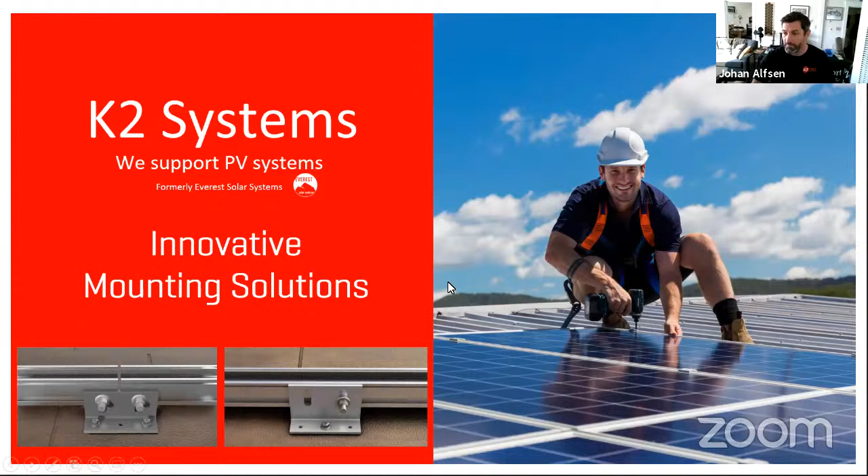So again, my name is Johan Alfsen. I'm the Senior Director of Product Marketing, but my background is in installation and technical training. I manage the marketing department along with Dakota, and she's on here in the background making sure everything's running smoothly, and she manages our marketing department. I come more from the technical side, managing product marketing as well as product technical training, and we're developing a whole new training program and adding all kinds of videos and technical tips and tricks and things like that.

So again, my background was as an installer when I entered the market. I entered the industry in 2004. Then from 07, probably actually 06, to about end of 2018, I helped launch Quick Mount PV, which was a company. It's not necessarily a company anymore, it's more of a product now, but I left them in 2018 and joined K2, which was then called Everest, and now we are K2, and I'll explain that in a minute. So I've been with K2 for about 3 years now, and my history has been working on product development, technical training, and obviously a little bit of sales as we got growing.

And Nick actually worked with me at Quick Mount for many years, so we've been on this journey together for almost 15 years now. We've seen a lot of changes, and I'm going to get into that as we get into this, what I call the evolution of mounting systems.

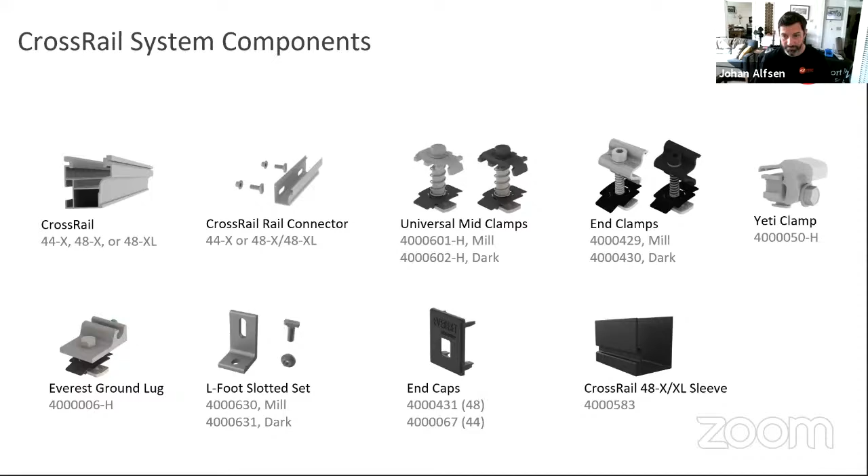So again, these parts are universal, and I'll just hop right into these parts real quick.

Nick, I didn't want to cut you off—I think you were going to say something. No, you're doing great, you were just going over the tilt system. We'll get into that when you get to that slide. Thanks, okay cool.

So just to show an up close version of these clamps, everybody—if you haven't used our system, the first thing you're going to notice that's different is the clamps and how they go in the rail. What's unique about our rail system is that you can use the rail as an actual raceway for your wires, which is really nice.

I just did a system using the new trunk cables from Enphase, and I figured out a nice setup where I tucked all the trunk cable into the rail underneath the mounting hardware for the microinverter, then let the whips that connect go out under the hardware. I didn't have to use any zip ties at all.

If I was transitioning out of the rail, we have little clips that clip on top and keep the wire inside the rail channel. Some guys like to go outside and do their connectors on the side—we have little side wire clips, and I'll show that in a minute. The rail has a nice deep channel so you can put your wires in there, but the clamps are really nice as well.

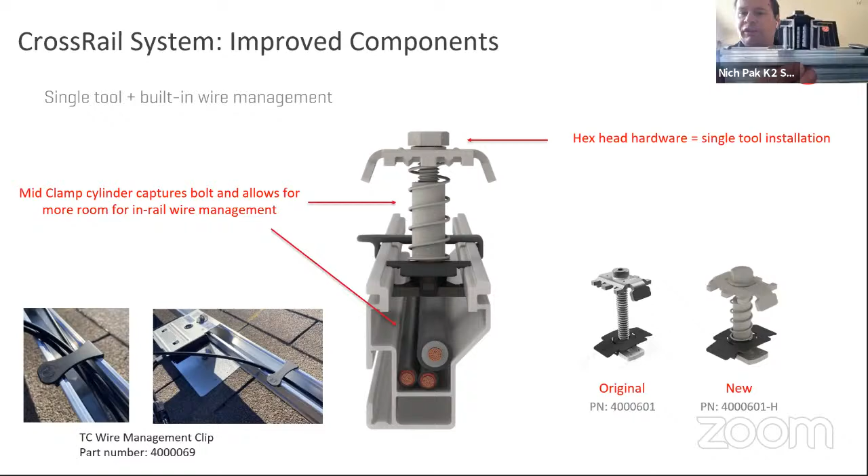I have a setup here on camera for everybody too, especially all of you Enphase users out there, or anybody who's doing wire management. I've got some module frame sections cut on our mid clamp right here for you guys. So you can see the engagement on the frame and literally how much surface area the rail has on that module frame, and a lot of people have told us there's a lot of positive engagement with the rail and the actual clamp itself with our system. And that's what we really try to drive for you.

But as far as what Johan was saying with wire management, I've got some Q cable in the rail for you. And you guys can see all of the real estate you have there to move that cable throughout the system. Like Johan said, this is a big deal in our industry. The only people who are making wire management accessories are the racking manufacturers. So it all does kind of land on us where to get all this cable managed.

So you can see here throughout the rail, there are a lot of options for you guys if you choose to jump onto our equipment. You can really manage the cable, loom it around, and get your system nice and organized up on the roof. Go ahead, Johan. Yeah, no, that's a good point. And the rail engagement is a really, really good point.

And a lot of our sales guys, when I say sales guys, I actually mean sales reps from our customers. So installation sales reps always get asked, why is this different? Or what's different about your installation than the competition? Because you're always going to have to compete against guys who are selling maybe cheaper stuff.

And not that ours is the most expensive, but we do have that German engineering that's pretty robust and sometimes more material. We're working really hard at designing products to not be too much material, have a good price point, but also be strong and maintain that German engineering that we're proud of.

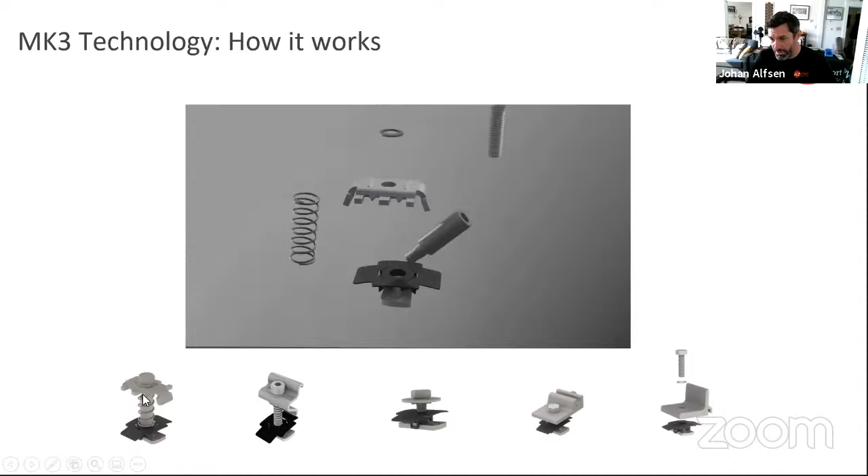So we provide these tools for you guys if that's something you're interested in. So when I talk about this rail engagement, this gives you a little bit better view inside of this digital animation. So it's all pre-assembled. There the clamp is going in, and then you'll see the modules go in.

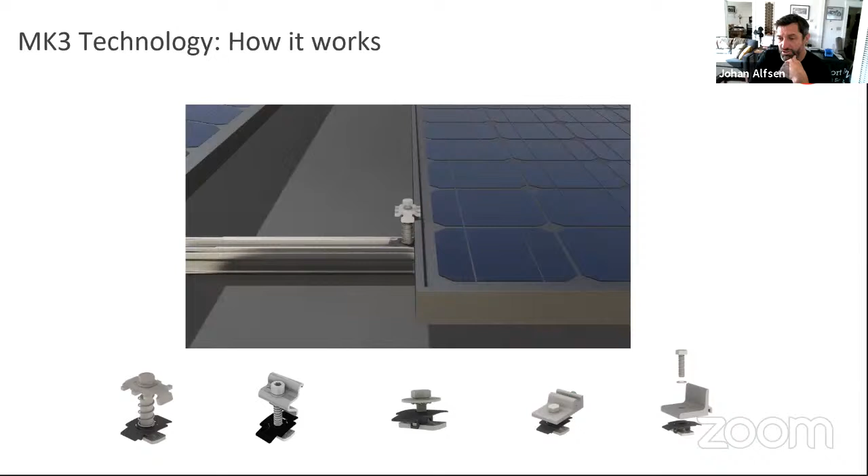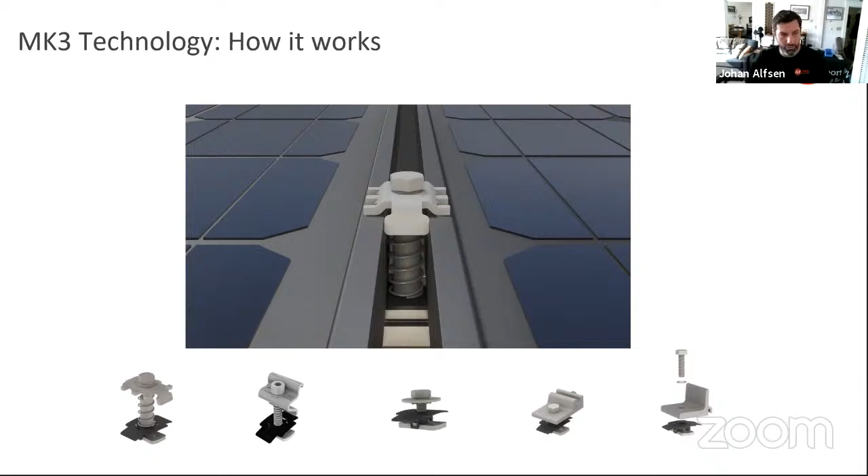So it's pretty simple. If you haven't seen this before, you can get a sample kit, and that really helps. If you're going to be transitioning to the system, just get a sample kit and play with it and see how it goes in, rather than being on the roof and trying to figure it out. So the robustness of those MK3s has been a big selling point for our customers, and it's just easier to install once you get the hang of it.

Our Yeti clamp is our hidden end clamp, and that grabs the inside flange of the module. That's a beneficial product if the system is on the edge of the roof or on the front side of the house, and the homeowner is going to be looking at it every day. You want to sell that quality and the clean look of it. A lot of people are installing skirts, but if you install a system well enough, you can actually make it look real clean, tight, and tuck the rails in with this Yeti clamp. So you can chop the side of the rail off flush with the module, and then use this Yeti clamp that grabs the inside flange and secures it, but hides the hardware, and you can end cap it. And that looks really good.

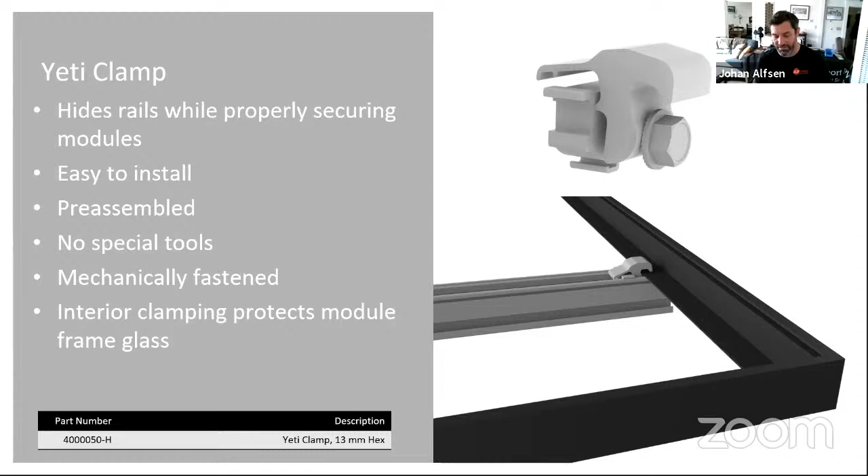If you are at the edge of the module, what I will say is, being an installer myself, on any hidden end clamp you usually have to get underneath the system and reach under there and try to tighten it down or pull it in. It usually involves getting your hands somewhat underneath the module. So if you're using this at the edge of the roof, it can be a little hard to do. So if you're the boss of the crew and you're not necessarily doing the installs, but you're leading them, just know that if it's on the edge of the roof, it might be a little hard for them to get in there and do that.

So that's where the standard end clamps that are top down mounted come into play. If you're using the Yeti hidden end clamps, I would still order the standard end clamps just to have them on the truck and in the warehouse as a backup, to keep it safe for your guys that are on the edge of the roof. You want to make sure they're not putting themselves in any kind of sticky situation, because it can be a little hard to work on the edge of the roof like that.

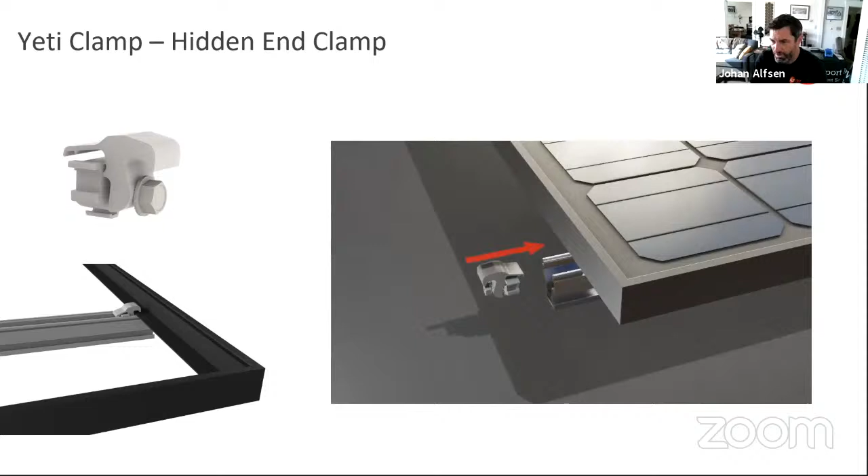So here's a little animation again. These are all from our product videos. Everything's pre-assembled when it comes together there. And then it shows you how the Yeti clamp goes under the module. You can see right through the module in this case, and it slides forward and then tightens down. When you tighten that down, it actuates that kind of hammer, and it tightens the Yeti clamp onto the frame of the module. And then you can put your end cap and make it all nice and clean and tight.

So there, Nick's showing on his camera the Yeti clamp and a little cut section of module frame, and physically showing you how it hammers down on there. And then the hex is inside the rail, and then you can cap it off.

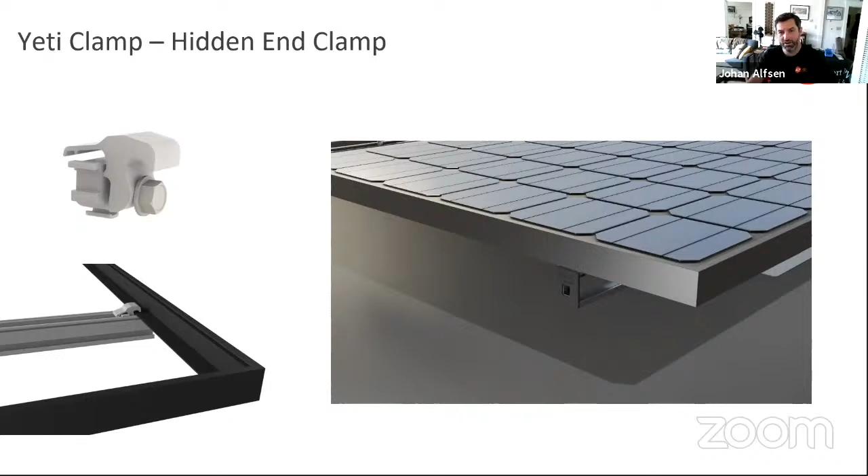Perfect. So our rail connectors, this is actually a really nice product. If you're using other racking systems, a lot of them use self-tapping screws, and they tend to shear off the head pretty easily because you're probably using an impact. And when you're using an impact, at some point, the screw is going to stop and it can't go any further, but the impact's going to keep going. So it shears the head of the screw.

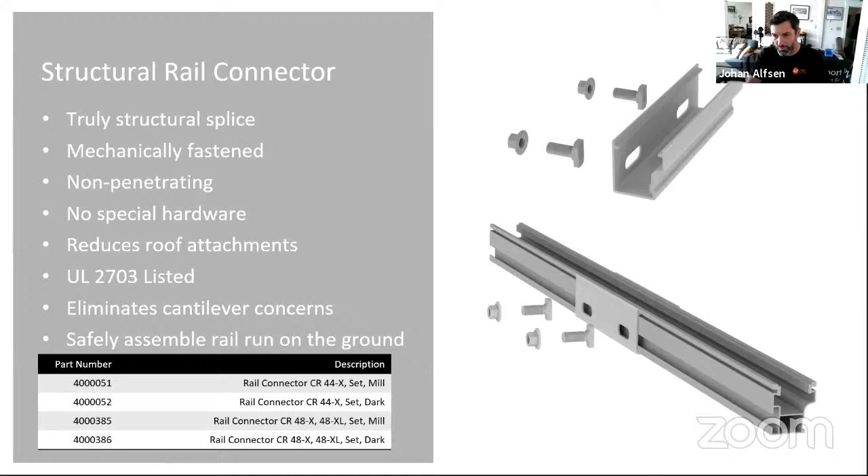In our case, we're using T-bolts. So it's the same T-bolts that connect the rail to your roof attachment. So you don't have to get any special parts. It's all the same. So this makes it a mechanically fastened rail connector. We call it a rail connector because that's what it does. It extends the rail and it connects the rails. Generically they call them splices. We call it a rail connector because this is not limited to any position on the roof.

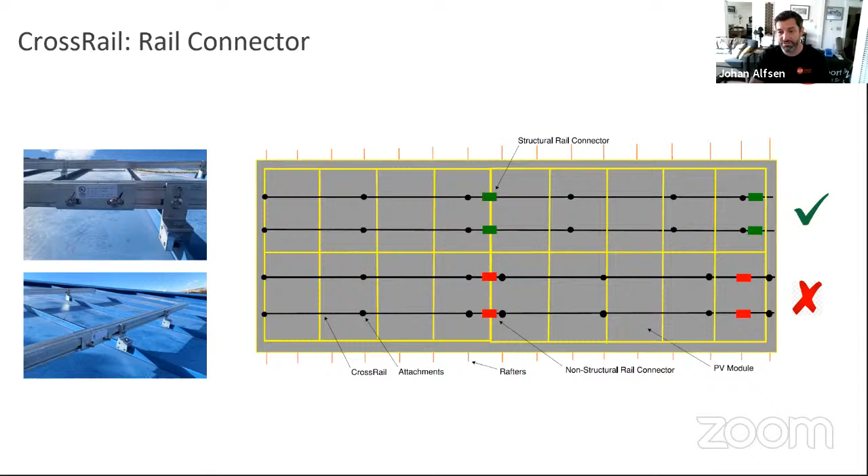So some competitors out there actually have limitations. If you read the fine print and you look at what their limitation is, sometimes you cannot install beyond that second to last mount. You have to be back sometimes 2 mounts, but our rail connector can actually be installed anywhere. So it's that strong. It basically extends the rail as if it was one continuous rail. So that is a huge benefit if you're installing these systems. There's no special hardware. It's not limited. So there's no room for error. So just keep that in mind.

So thank you, Johan. A lot of people do ask us about these clips, and they do slide on the channel. So if you need to move them across the roof, you can. It is a malleable ABS, but it's very friendly to use. You can engage it, disengage it when you need it, put them where you want. So I have people in Northern California who use both. They'll use the top channel clamp and they'll use the side attach Omega as well. And they'll mix and match just for flexibility on the project.

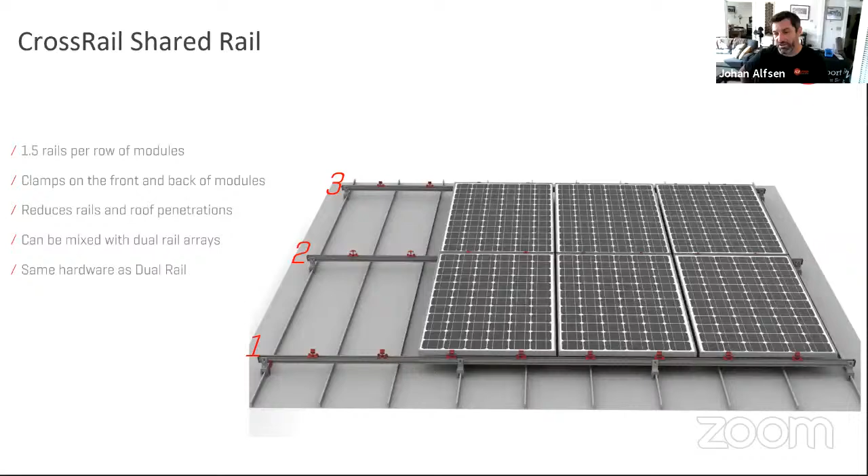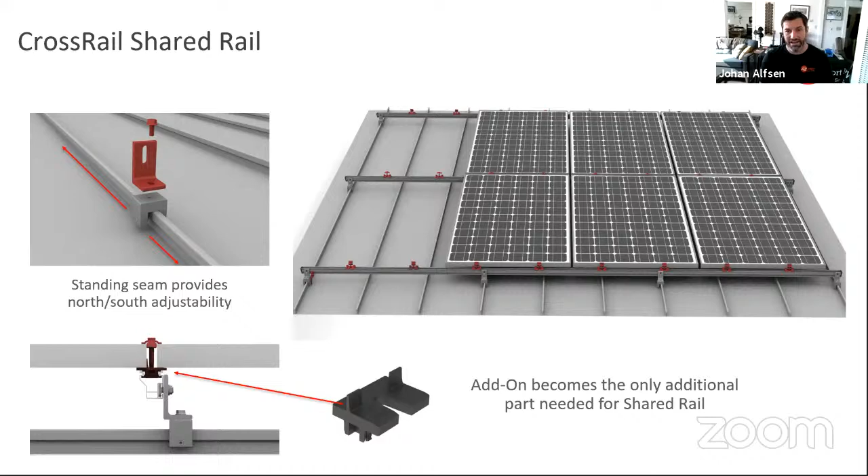Here's the up close of what that looks like. As mentioned earlier, there's only one additional part that changes it from a dual rail to a shared rail - that plastic piece we call an add-on. If you have your mid clamp on here, you basically take this add-on and slip it to straddle over the mid clamp, and that goes in the rail, then you turn the mid clamp to the side and allow your modules to fall on each side. The bottom left picture shows a side profile view of what that looks like. It gives you a perfect shelf to divide the 2 modules so they're not slipping in one direction, and it gives you a nice even split. You push them flush and then set your mid clamp. The same mid clamp for any system on CrossRail will work for this, and it still gets that nice bond for UL 2703 listing.

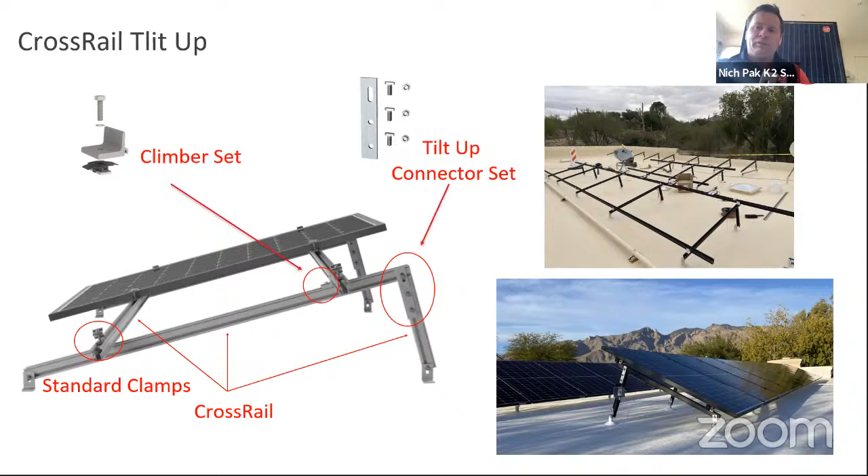And managing water and drainage on a flat roof is a lot easier because you just have to pitch it a little bit, 3 degrees, 7 degrees. So we're starting to see a very high demand for people asking for a tilt system that's adaptable and easy to install. Our tilt system is extremely forgiving - the parts are small, and you have the freedom to make it any size you want in the field, or you can get super organized, cut the parts in-house, and deploy them to the job site. So there's a lot of return on investment with this system.

Awesome, thanks man.

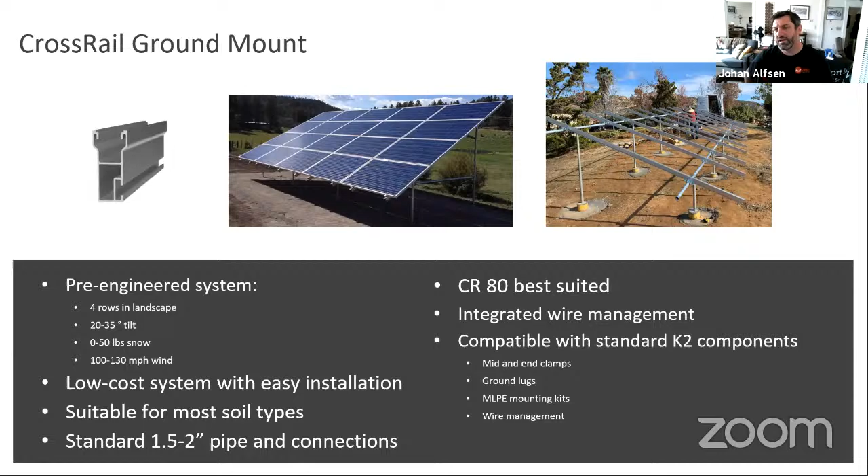So the other system we have within the CrossRail family is the ground mount, and that uses the CrossRail 80. Pretty standard - if you're building up, piping out of the ground, there are different ways to attach to the ground. You've got cast in place, ground screws, helical piles, or ballasted, depending on how you're doing it. You're building up piping, and then we have our ground mount system.

We are actually fine tuning this and offering more universal parts for this. So if you've never used our ground mount system, definitely pay attention to our website, because we're about to release some new improved parts to the ground mount system that are going to be more universal.

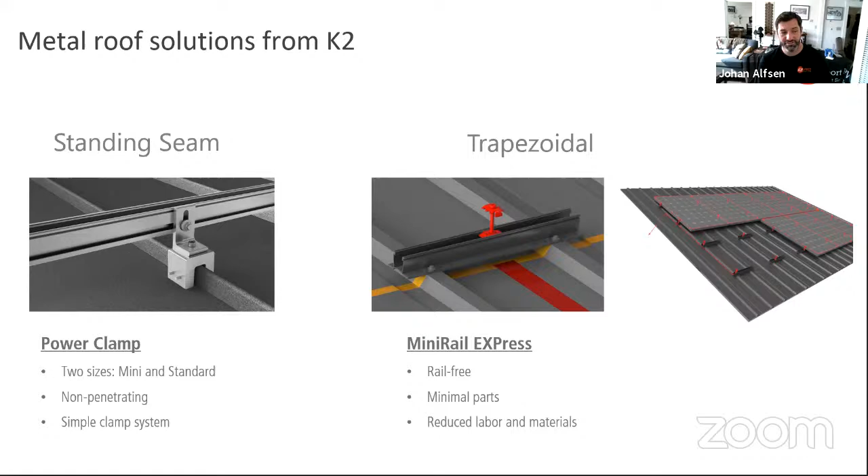For metal roof solutions, as I mentioned, we have a standing seam clamp, and we have a trapezoidal and mini rail system. The power clamp mini is just a single pin, and the power clamp standard is a dual pin. I've got both examples here - they look about the same, but you can see one has 1 pin and the other has 2 pins. It just depends on where you're at. Most guys go for the 2 pin if they're in snow country, which is really common for metal roofs.

So you can check that out - we do have the power clamp there, with the part numbers listed.

The mini rail system is pretty slick. It actually bonds the modules at the intersections, and it allows you to install this smaller mini rail - this guy here. You can see it has these EPDM pads on the sides, underneath here. What this does is it's got a series of holes, so you can shift it wherever you go, and you're only doing one screw per corner. You're not putting all these holes in - this just allows you to shift this little piece, the mini rail.

This is the rail. It comes in boxes of, I want to say 30, and they're just stacked in there. So less parts, no big rails - you just put this down on top and it attaches to the metal itself.

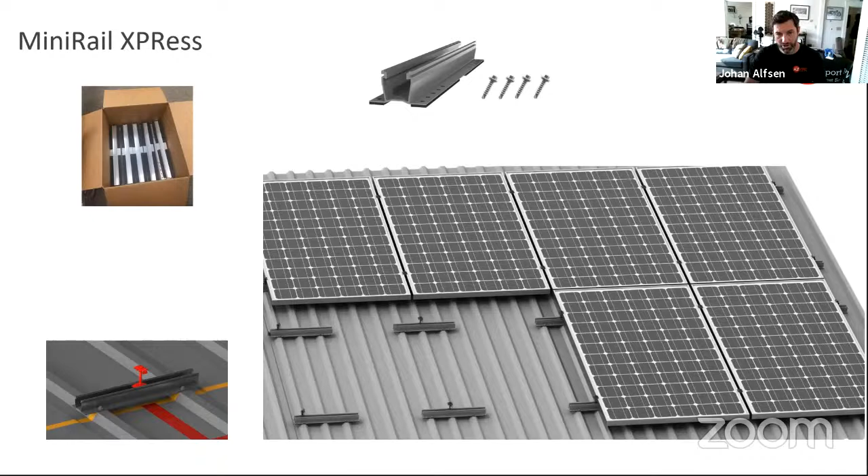As long as it's 26 gauge or thicker, you can attach it to the metal and not have to look for the structure. So you're at the high point, but it has to be that trapezoidal profile, and a certain thickness and width - it's all in our calculator. If you're wondering about that, you can always get in touch with us and we can show you if it's the right system for your application.

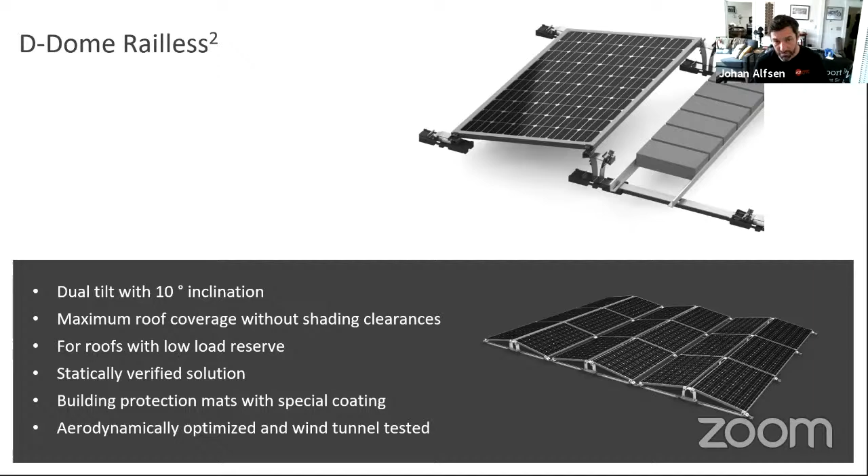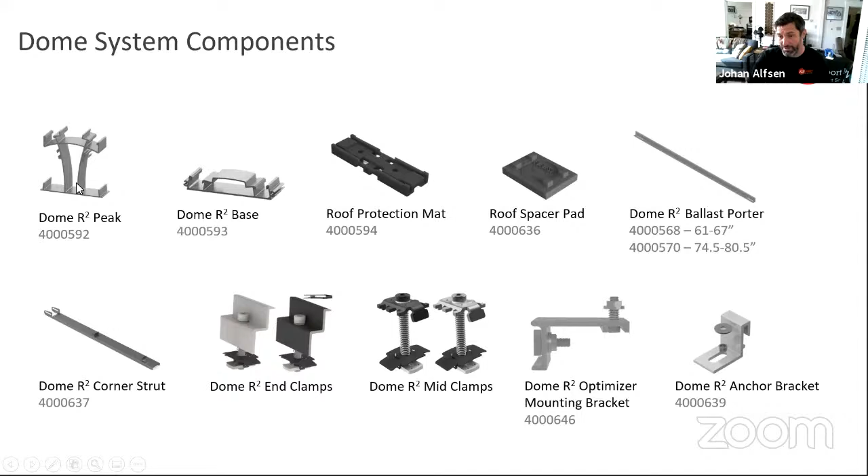So I'm going to get into this, this is a presentation I did at NABCEP. We just did the NABCEP conference a couple months back. I did a presentation called The Evolution of Solar Mounting Systems, and a lot of people liked it. I wanted to show some of the fun slides in here to show you how and why we're getting into these self-sealing butyl non-metal flashings for comp shingle roofs.

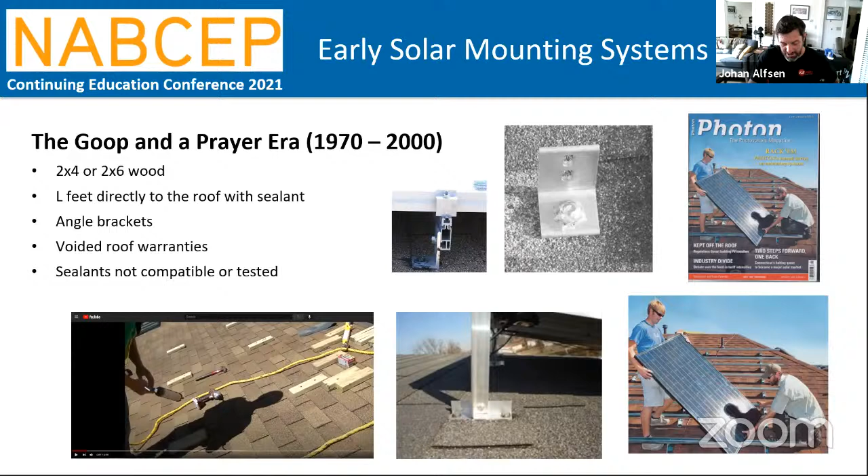One of these, this bottom picture here with this angle stock bracket, you can see where it's concerning. Your seal might be okay because you gooped it up and your prayers are really good, but the depression that it makes into this comp shingle is where it gets a little concerning. You get a lot of expansion and contraction as the roof moves. With the heat and cold and fluctuation in temperature, and this depression in there, it cuts a line into the shingle and water can get in there. That was the big concern, and there was no testing for this.

So what some of the more conscientious installers were doing in the early 2000s, they were starting to try using roofing products, which is smart. They were using things like Oatey flashings. I'm in Berkeley, California, where solar was adopted very early on, so I still see some of these Oatey flashings out there — some have survived and lasted, some not so much. You can see the cracking and degrading of the rubber. As I mentioned, these roofs move and can move this around, and if it's exposed on the edge, it could crack that seal and that rubber. And then there's also room for error.

That's literally a picture a guy sent me of a conduit going through, and you'd be amazed at the stuff I get sent. But yeah, that was a fun one. So installer error there, it's not a bad product, but that's installed improperly for sure.

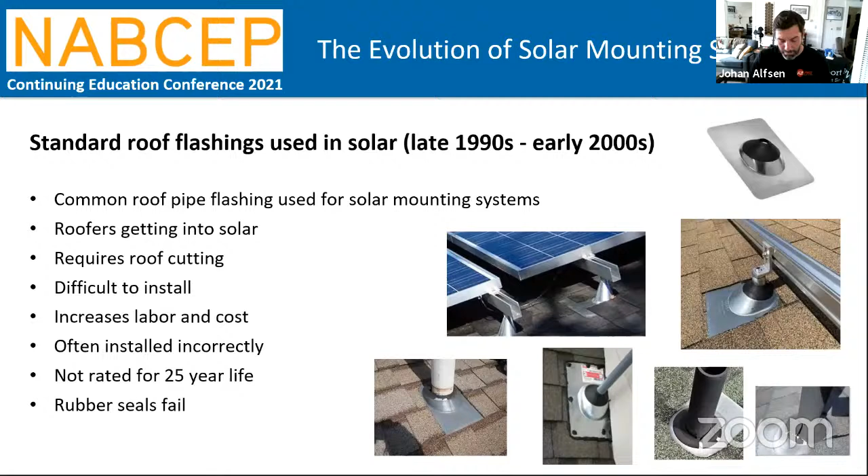The one on the top or middle right, the brown comp shingle roof, that's done properly. So that's the way to do it right. But these are time consuming, labor intensive, and can be quite expensive. Cutting the shingles just takes too long.

So in the early 2000s, I worked for another company and we started doing flashings geared more for the solar installer in mind. It just started out as us making flashings for ourselves, and then it took off and other people wanted to use them. We started manufacturing, and that's how that company was built. Since then, all the manufacturers make their own flashings now - comp shingle flashings, replacement flashings for tile, you get into rail-free systems.

There's been a lot of innovation from the early 2000s to now. There's been so much progress made in the solar mounting sector of the solar industry, and it's pretty exciting.

Now what you're getting is we're starting to see some of these metal flashings be installed improperly. These aren't necessarily bad products whatsoever, they're made well. It's just that they're installed wrong. This happens a lot.

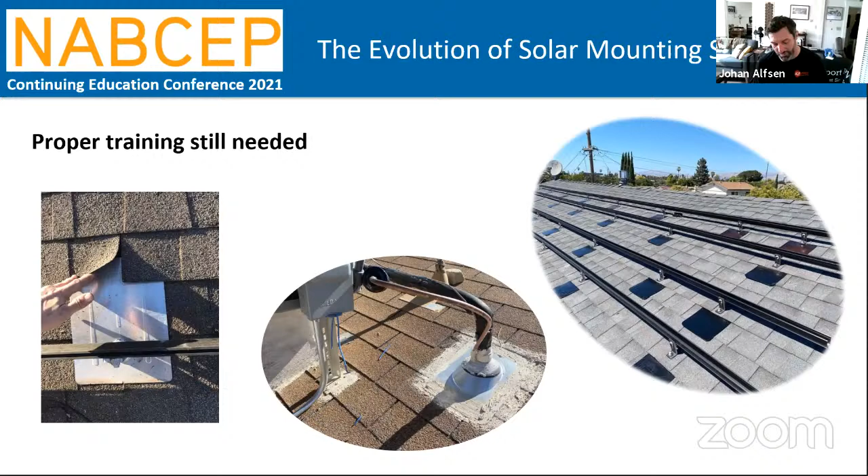So there's a lot of room for error. And not only that, metal flashings are never going away - the installers know how to do it, it is roofing best practices. But sometimes if you're in places like Nevada, like Las Vegas, big solar market there, really hot too.

And the shingles just get baked. When they get baked, you can't necessarily break that natural seal to get a metal flashing underneath there. So these non-metal flashings are coming into the market now, and I understand why. A decade of my own career has been talking about flashing and roofing and best practices, but now you're starting to see these non-metal flashings come into the market, and I can understand why.

Because when you're trying to pry up the shingles, you can damage the shingle. You can void the warranty of the roof. You can rip the shingle. You can create other problems that are doing more harm than good.

And I understand that in places like Arizona, even where Nick lives in the East Bay, in the valley, it gets really hot, probably like in the hundreds in the summer sometimes, and just bakes those shingles down to where you can't pry them up without damaging the shingle. And you could even say that with the cold too, they get brittle and they can crack and corrode and break. So I understand where these are coming from.

And some guys will say, well, aren't we going back to the goop and a prayer era? And I will say to that, no, because these manufacturers are hopefully doing the proper testing, using the right materials that are compatible, and providing engineered systems that are going to be compatible with these roof types. So when we were looking at this and starting to make new roof attachments, we took a hard look at all the products out there, and everybody uses something different.

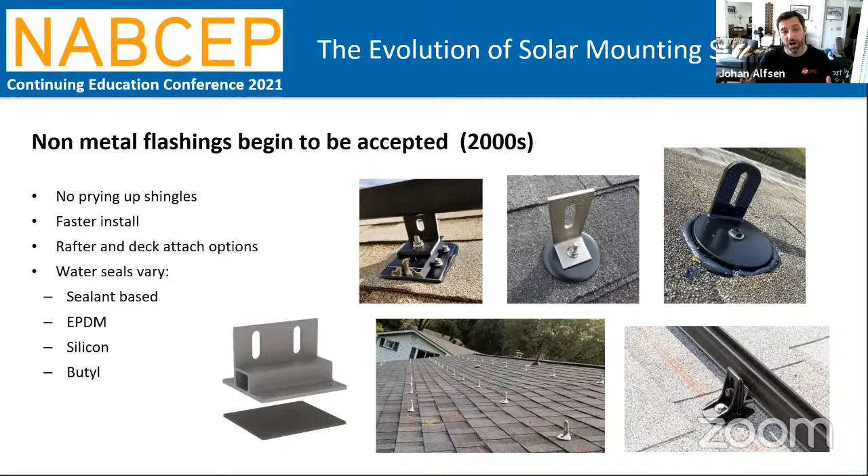So when we researched all of these, the most data we found, honestly, was with, and I'll go back to this slide, but I'm gonna skip real quick to this slide. We found that Roof Tech had the most data, the longest track record of using butyl. They did all kinds of extensive testing, salt spray test, heat tests, obviously the structural testing as well, movement.

So they use a specialized butyl, and we were so impressed with it that we ended up sourcing the same butyl and putting it on our own product, which is called the splice foot. So we use their butyl and their screws, and we're researching all kinds of different styles like this to see what works in different applications. But right now our splice foot uses this butyl and these screws, and I'll show you the benefit of that here as we get into this.

So let me back up again, talk about comp shingle roofs real quick. The reason why this is important to know is because when you're installing on top of a comp shingle roof, the style of the comp shingle is going to become important because you're going to have uneven surfaces. You're going to have seams and breaks between the shingles, and it's important to know.

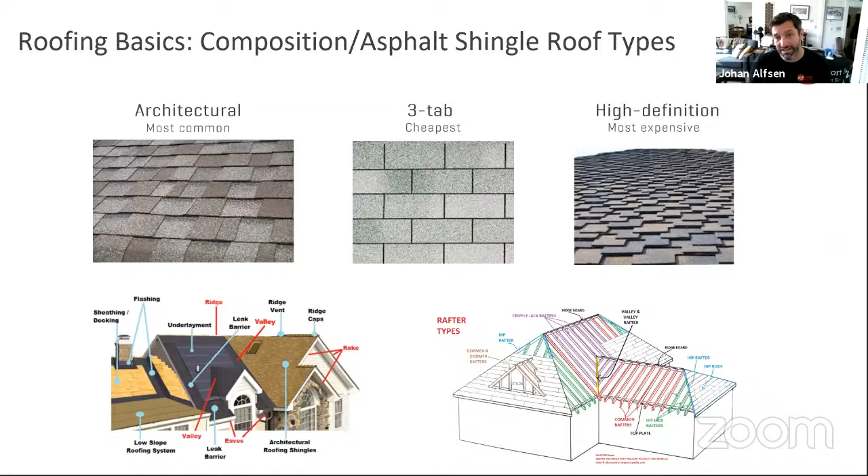And then the high definition shingles are not as common. They are very high end, so they're more expensive. You see them on high end homes, and they last much longer, probably more like a 50-year life mark. And they have these decorative staggered teeth to them, and you can actually cut them and make a clean, nice, even surface to attach. But they are thicker, so you want to make sure you're getting your threads down through the comp shingle and through the ply and hitting your structure, whether that's deck or rafter. So it's just good to know.

And then also with shingles, I do a whole section on roof inspection. It's almost like you're renting a car, right? You want to walk around the roof and make sure you're not inheriting any pre-existing damage before you install on the roof. So looking at the shingles and making sure they're not blistering, cracking, corroding. You can see when the granules start coming out, when it starts to age and the shingles are becoming loose. You could tell when it's time to go. And that's when you want to re-roof.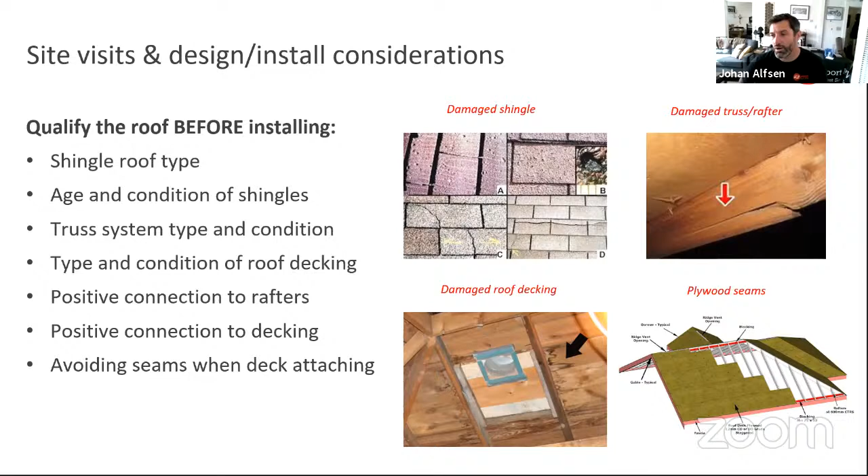And looking in the attic, what's the structure? Is it plywood, OSB? Are the rafters intact? What are you dealing with, basically? So I do that more in our certification program and our training, and we're doing a lot more K2 pro tips and stuff like that in short videos.

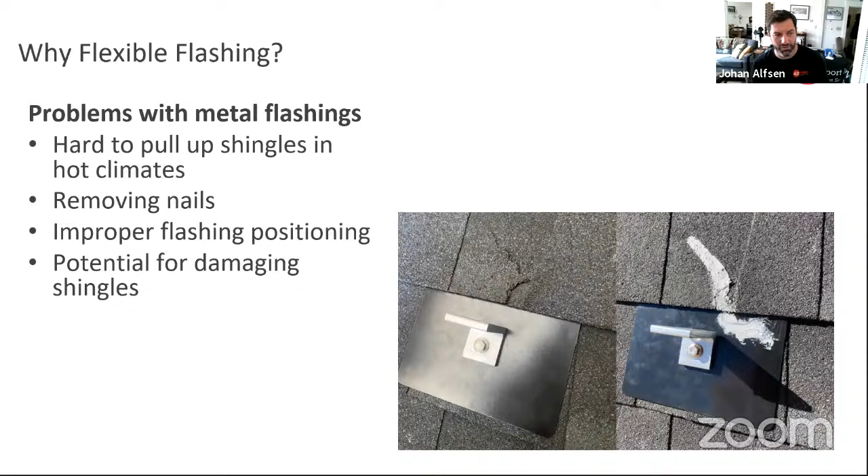So you can see where there's a problem where prying up shingles, removing nails, there could be some pros and cons to that. The number one problem to that is damaging the shingles, ripping the shingles. So there's one I ripped up on, kind of on purpose. I got a little aggressive just to see what it would take to rip them. And then you got to seal it up. Sometimes you don't have black sealant and it looks bad, and it gets all over the flashing, your gloves, your pants, your tools, your work truck. So nobody likes dealing with sealant. And if we can eliminate it, that's best.

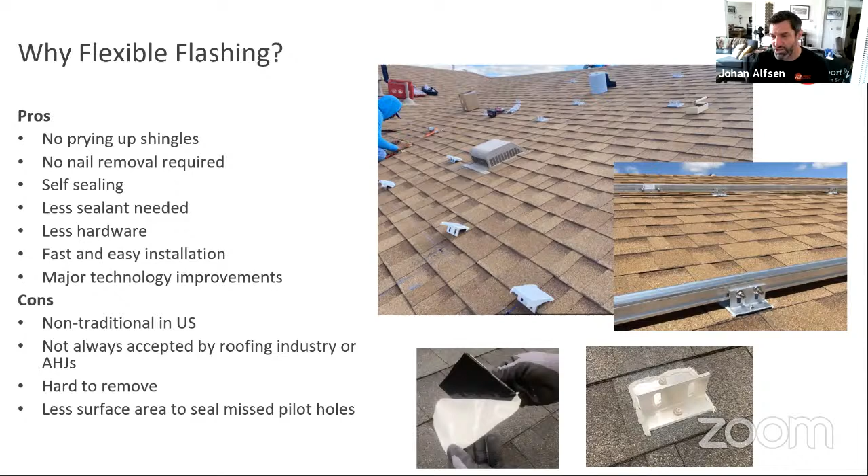And then you also see sealant going around the edges. And we actually just got that approved that it doesn't need that sealant going around the edges, because the butyl does squeeze out. And as I mentioned before, the metal can depress into the shingle. The butyl actually squeezes out enough to protect those edges and not need any additional sealant on the edges. So that's a huge plus. And that is some changes we made once we released this, which we just did for the Splice Foot X and XL.

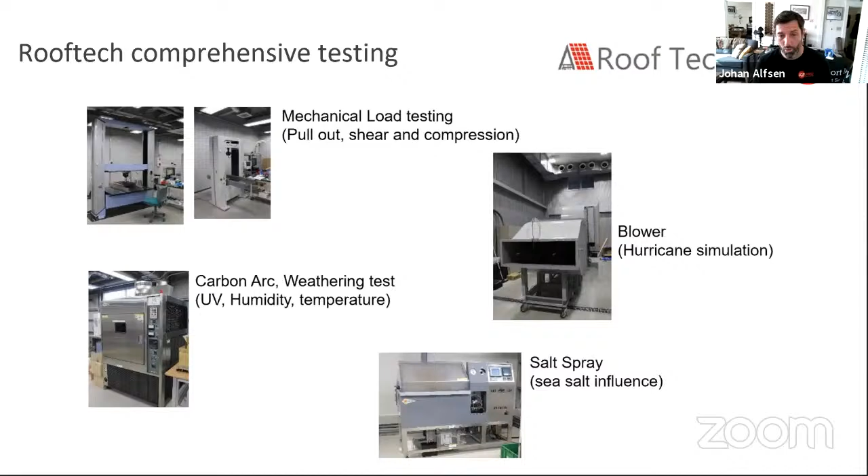So as I mentioned, we use the Roof Tech butyl and the screws, and they have all kinds of comprehensive testing. And we're also doing our own tests, and we're even testing other materials as well to see what works best. And obviously supply and demand is really tough in this era of COVID that we're working in. So we're always looking at new solutions, but right now this specialized butyl is working out very well.

And you can install this on almost any surface that is compatible with comp. Rolled comp flat roofs do work as well, some metal roofs as well, and some TPO roofs actually. So it's mostly used for pitched roofs, comp shingle. You do want to pay attention to the temperature of the butyl because it's tacky, and the temperature of the roof, not the ambient temperature outside. This is the temperature of the actual roof type. So I think there's a little typo there of the ambient temperature, but it's the surface of the roofing itself.

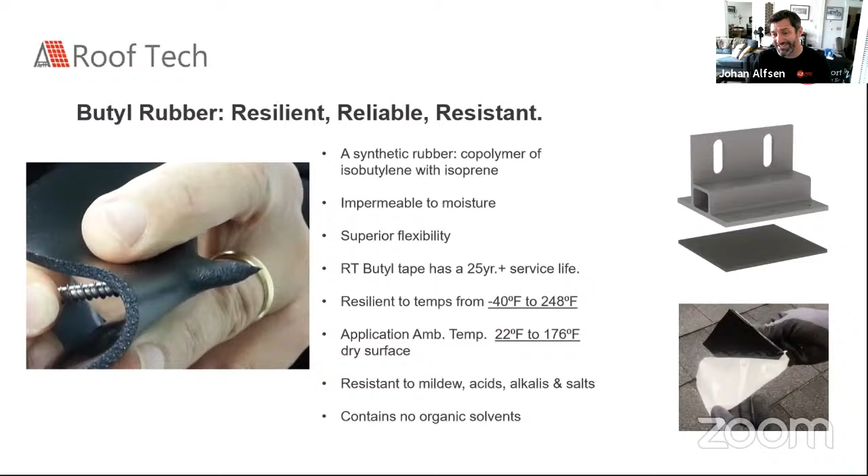So you want to be in that 22-degree range, and you can just get a little heat gun and measure the temperature of the building, and actually measure the temperature of the butyl and make sure it's at that temperature. The reason being is because that butyl actually seals those screws as they go through the butyl; it seals itself in the threads and you don't need additional sealant.

So we have the splice foot X and the XL. I'm going to skip ahead here to show you the application of it. So there's the X and the XL. The only difference is basically the height off the roof. So this is the XL. I'll have both here. To show you a side profile, here is the XL in my left hand and the X in my right hand.

And basically the difference is we added this little shelf here. What that does is two things. One, it gets the rail surface off the roof a little more, and is a little higher profile, which actually is still pretty low profile and looks real clean. And it also creates a nice little shelf. So when you install these, you want this shelf to the ridge of the roof. What that allows you to do is place your rail right on top of there, and it lines you up perfectly with the T-bolt.

So if you're an installer or working with your crews, you'll know that when you put these big 14-foot section rails down, you're usually laying them on the roof. Then when you go to attach it to the roof attachment, you've got to put your T-bolt in and secure it, and sometimes you have to have a partner on the roof holding it up to get it where you want. The shelf actually acts as that partner, so you could do it solo. You place these right onto this shelf and it stages it perfectly so your T-bolt can go in there and you're set to go. So that's just a nice little tip for that system.

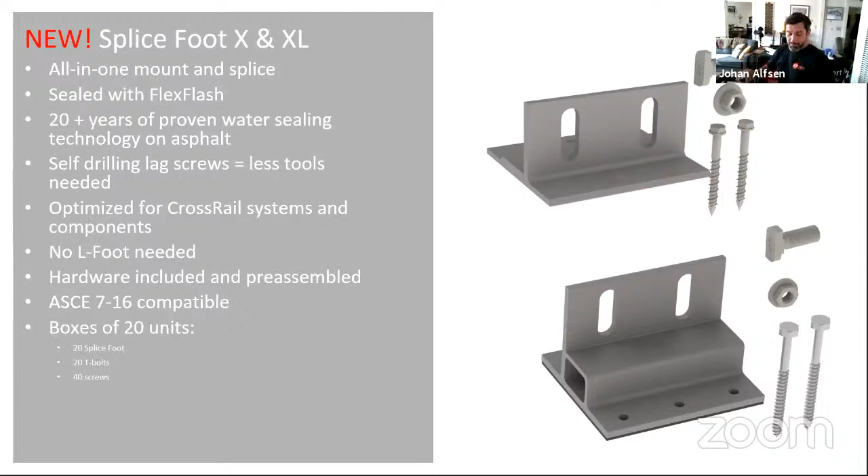So they call it the splice foot because you can use it as a splice. Notice it has two slotted holes in the foot. You don't have to use it as a rail connector or splice. If you have one rail going all the way across, then you only use one T-bolt. So one rail, one T-bolt, and it is kitted with screws to go into the roof, into the rafter. So 2 screws and one T-bolt set per mount. I believe they're boxes of 20 mounts, so you get 20 T-bolt sets and 40 wood screws to go into the rafter.

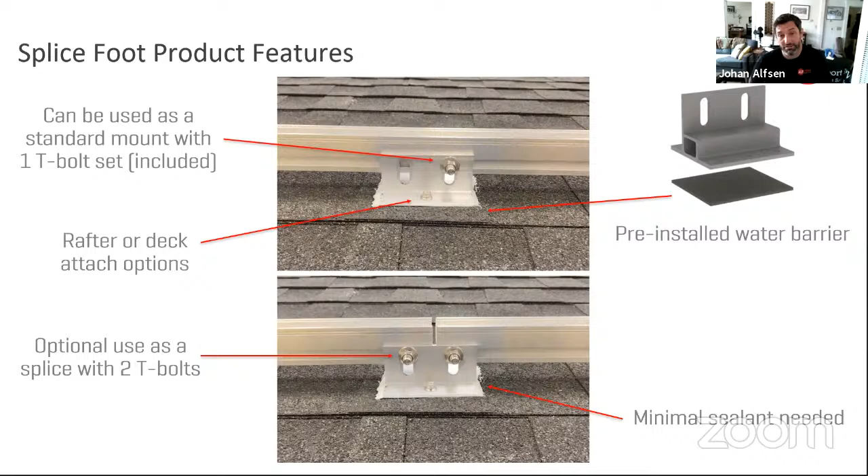But the most important thing to know is whenever I get on a job with a new crew doing this for the first time, they see those 2 slots and they automatically want to put 2 T-bolts in there, which makes sense, but it's only because it's an optional splice foot. If it's one rail going across, it only needs 1 T-bolt. You never put in the 2 T-bolts unless you're connecting 2 rails at that intersection, and you don't have to do that. Let me skip ahead real quick. Well, I'll go through the installation process and then I'll show you how this works.

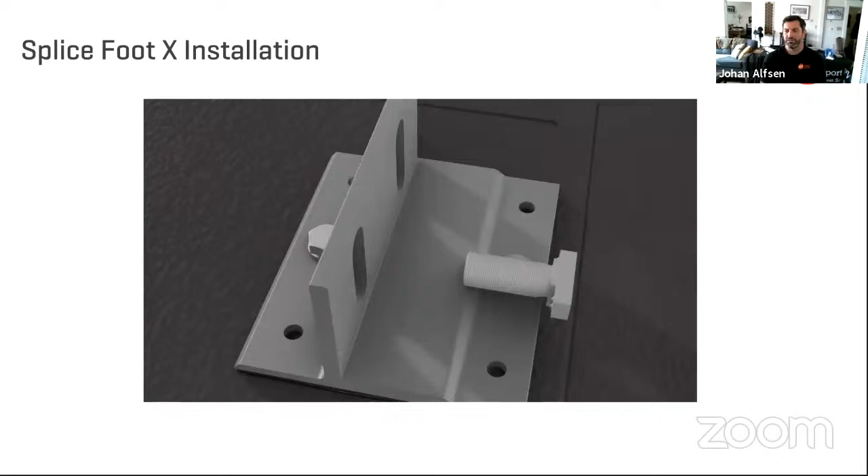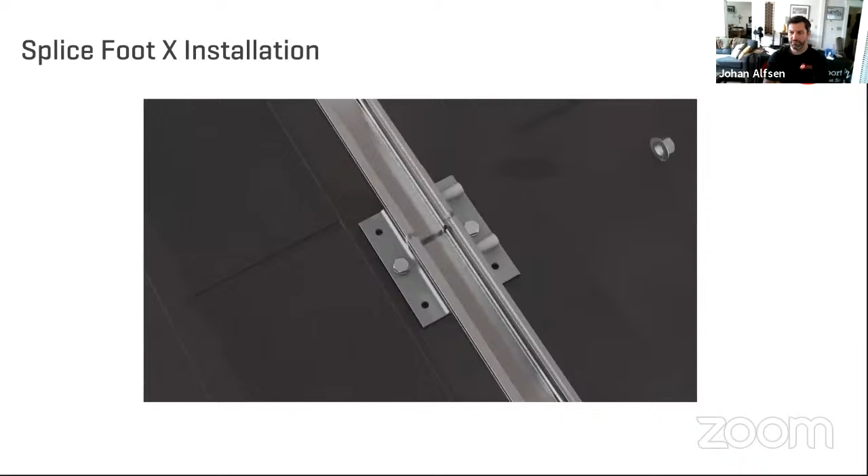And then there's the splice function, I'll let that play out for a second. So that's an animation from our video. We have a whole installation video that's about to be produced, and there's one overview video already on the website you could see. We also have an installation video, and I'll just run through it here.

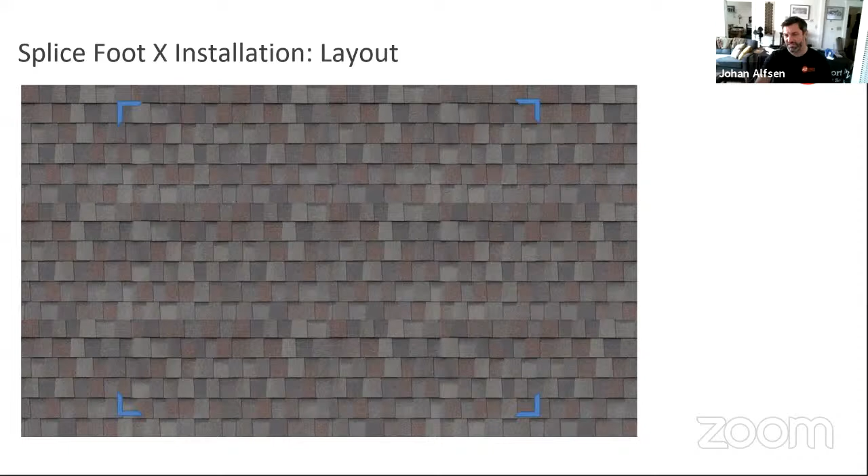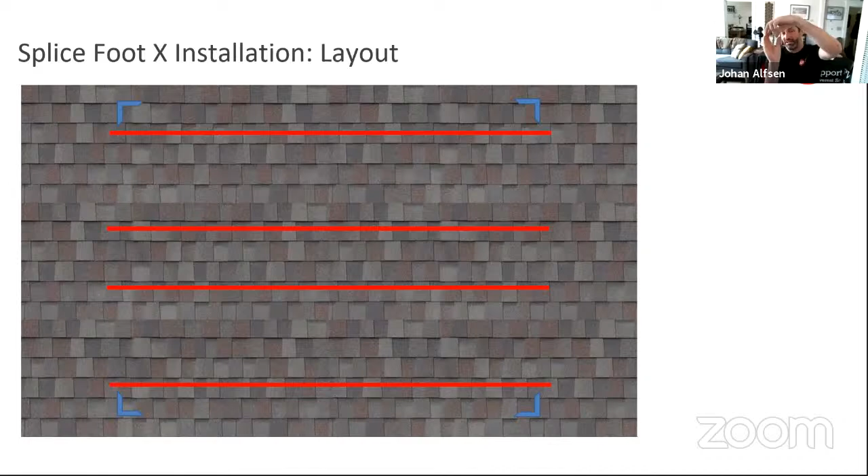So naturally, you're always going to corner out your array. You do your design, your layout, setbacks, all that fun stuff. Then usually guys just pick the course line they're going into to get the frame and clamps going, so the rails go where they need to and clamp on the right section of the module frame. You can see that a little better here, right? You have clamping zones on the module frame, and that's going to determine where your rail goes. So most guys will pick a course line that falls within that range to get their clamp zone.

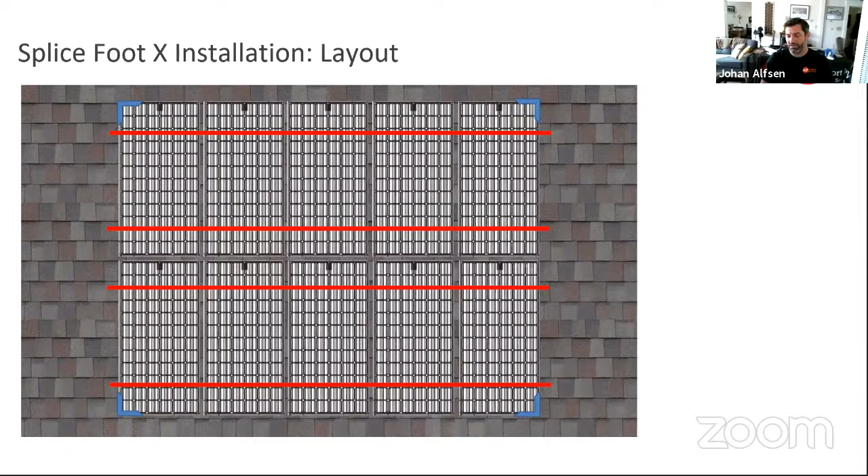But I like to snap chalk lines. If you snap a chalk line, it gives you a nice straight reference point to put in your mount. You can use that shelf, or this little ridge at the back of the mount, to line it up, or just line it up with that L-foot section, whichever you want. It gives you a nice reference point to line it up straight, and that's going to make sure your rail is nice and straight. Some guys go off the shingle line, and that's okay if you think the shingle is straight, your rail will follow that. But snapping a chalk line makes sure it's straight and your rail isn't wavy on the roof, so it looks clean and good.

So in this case, it's just going through the animation I showed you. You peel the paper, you put it down. Again, this is an older model, so it only had the rafter option, but you can go to the deck, and I'll show that. You add sealant to the edges if you want to, you don't have to, it's now a new optional step. And then again, there's the single T-bolt set for one rail, which is included, and two T-bolt sets if you're going to be splicing it.

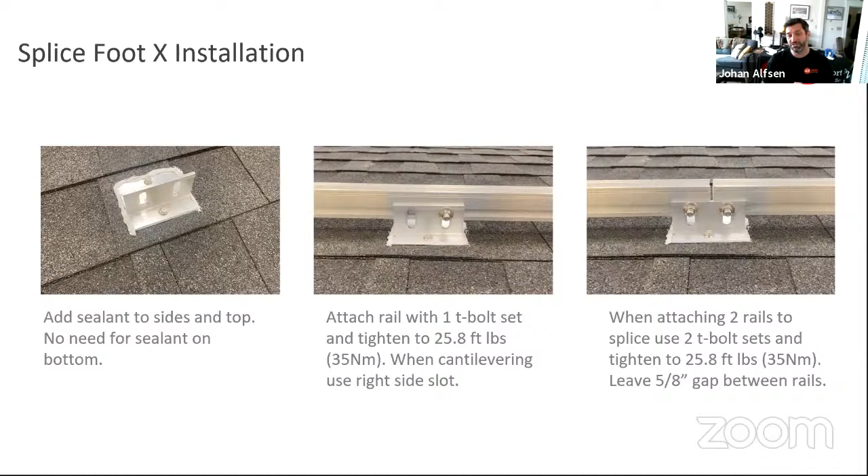And if you are splicing it, a lot of guys, every time I go to a job site and explain the splice function of the mount, they typically say, well, it's not going to line up that way. But on the job, I always say, that's fine, you don't have to use it that way. As long as you've got rail connectors on the truck, you're good to go.

So here's a good example where they had staggered mounts and were laying out their rails, and sure enough a couple mounts lined up pretty close, almost perfect in some cases, to the rail intersection. If that happens, by all means you omit that rail connector and connect it to the splice foot itself. A lot of guys install the rails, have little rail ends and cut them off. If you've got enough play, within a foot or so, and want to move it over and grab that foot to do the splice foot function, you can. But if it's outside of that, you want to use a rail connector, you can. So I highly recommend keeping rail connectors just in case on the truck, so you have that function.

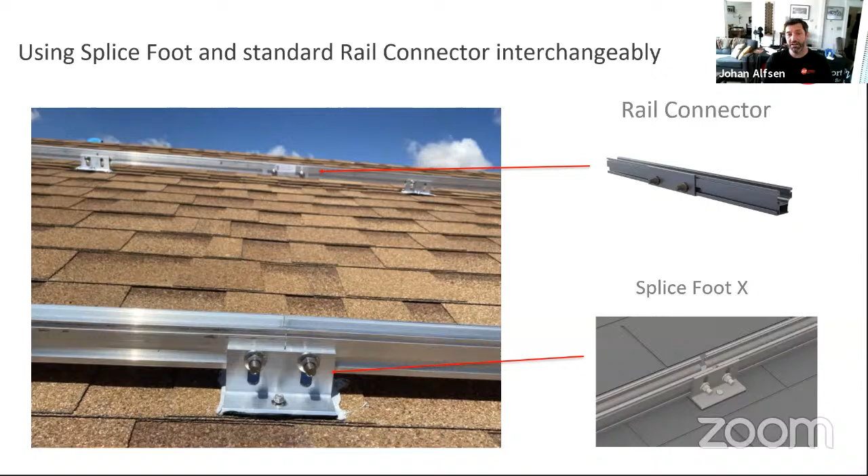But you can always throw in a mount if you need to. And the nice thing is, the reason we have this longer flange on the side is because you can slip it under the rail if you had to, and still have access. Even if the rail's there, it's not blocking it out, you could still have access to those screws if you want to throw in a mount.

Sometimes guys will put in mounts and their spacing is wrong, and they forgot one mount maybe on the edge where there's an edge module, and they need to put in a supporting foot. You can actually throw one in underneath the rail and still get access to those screws. And then determine if you're going rafter or deck attached.

So we've done our testing. The same screw, to put this in perspective, here's our biggest one for our tile hook. Here's a big 5/16 screw that is standard with any mounting system. And here's our screw for the splice foot. They're a much smaller diameter, much smaller on the head, and you're putting 2 into the rafter. A 5/16 going into a rafter is a pretty big bolt going into the rafter.

If it's a single penetration for a mount, I understand a 5/16 is pretty standard, right? With any kind of flashing mount you're doing, that makes sense. But if you're going 2 bolts into the rafter, this is surprisingly very strong. And the other thing is it's small.

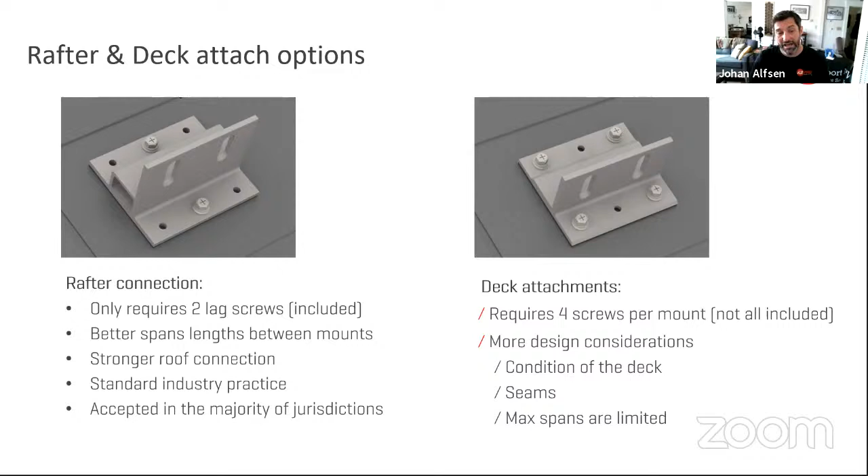So I always say go to the rafter if you can, but sometimes you get out to the edge of the system, or you get into rafter changes, and all of a sudden the rafters are going horizontal on you now. They're going east and west, right?

That's where deck attachment becomes a huge advantage. We have done the testing, and you are allowed to do this, but just remember that you want to do your research. The other thing to consider is the plywood.

If you look at how plywood is attached, you're going to have seams. These plywood sections are usually 8-foot by 4-foot standard sections, so somewhere in there you're going to have some seams. You want to make sure you're not hitting that seam, and that it's not spinning on you.

That's why I say use rafter connections as a primary attachment and deck attach as secondary if you have to. It does help in these tricky situations.

Getting into tile real quick - I know we're running out of time. It's amazing, you guys give me more time and I'm just going to talk more. I know I saw some questions in there, there's only 2 so far, so I don't think we have a lot of questions. But getting into tile, I do a whole section on tile, so I'm just going to blast through this real quick so I can get to the Q&A.

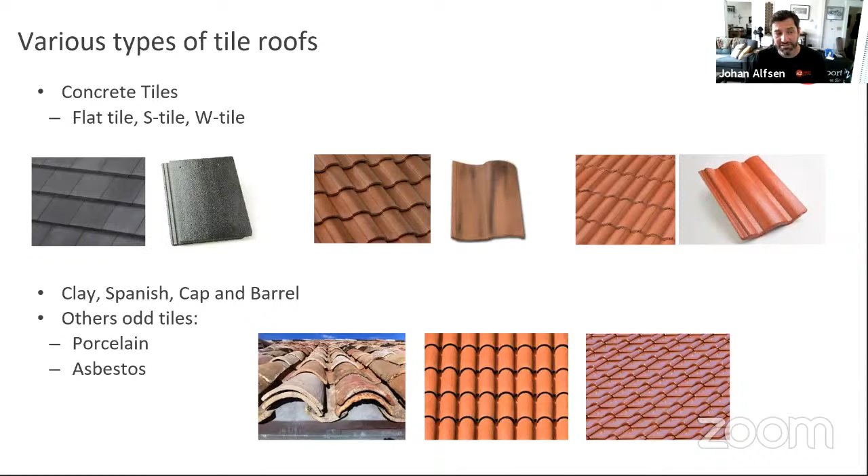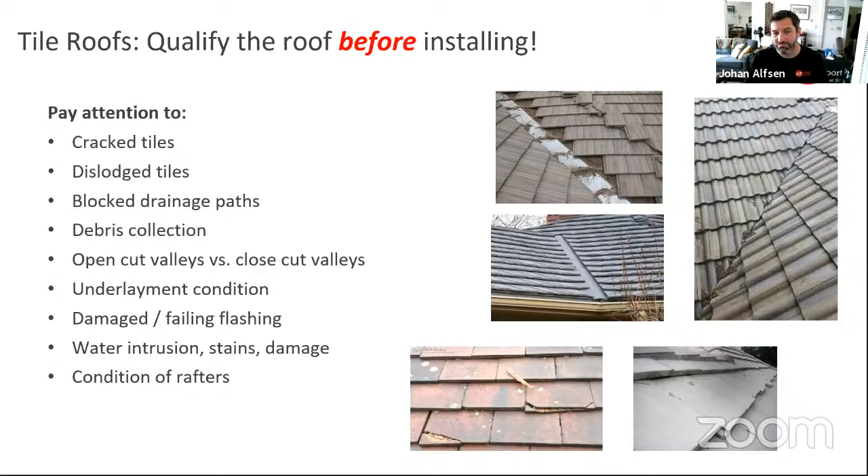Concrete tiles, these interlocking tiles, we have some great products. I do a whole section on roofing best practices on tile construction - things to look for like cracked tiles, doing that whole investigation process of site visits. There's a whole new set of rules for things to avoid like damaged tiles and roof leaks. But the way tile installations are commonly done, you're grinding the bottom of the tile if you're doing tile hooks, or you use a replacement flashing.

So we have a bunch of different tile hook options. We have our standard 3S hook that came from Germany. It's probably our strongest - it's got adjustable heights in the foot itself, and it has a return and uses an L foot, so there's so much adjustability there.

We actually tried to discontinue this product because it's a higher price since there's just more metal, but we have a couple customers that just love this product and they do not want us to go away from it. So it's not going away - 3S will stay as our tried and true.

We have a beefy flat tile hook that we brought over from Germany, and it is very stout. It's a little bit short and stockier. In Southern California, we got a lot of guys using more steel hooks, so we did just introduce a more cost competitive option for steel hooks.

So we have a one-piece welded hook. We try to name the products based on what they do, so we have 2 universal hooks. One is a 9-inch base, it's all one piece, as you see there. It does come with the lag screws as well as the T-bolts.

We have the standard hook plus 2, meaning it's 2 parts because it's adjustable, and then it's a 5.5-inch base. So it's a lot of adjustability. It's probably one of our more popular ones in Southern California.

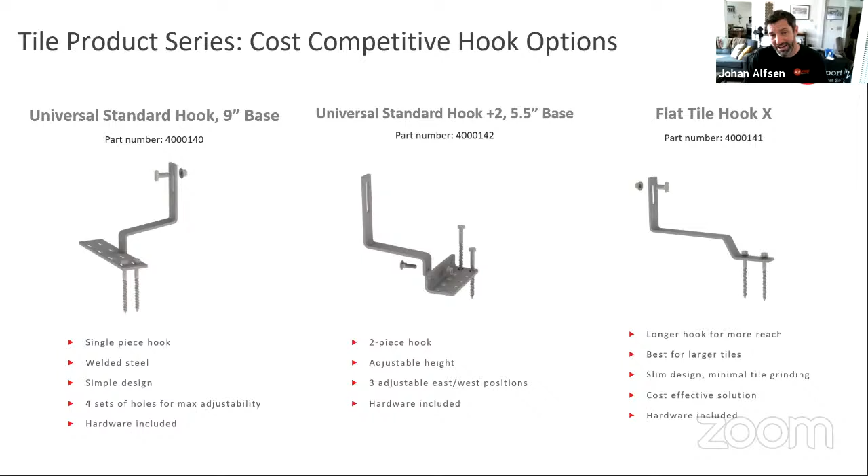And then we introduced a new tile hook that's a little thinner and longer, so you can have more reach - it is the Flat Tile Hook X. So we have all these tile hooks available now, and we did just introduce our Everflash TRFs, our new replacement tile series for concrete tile roofs.

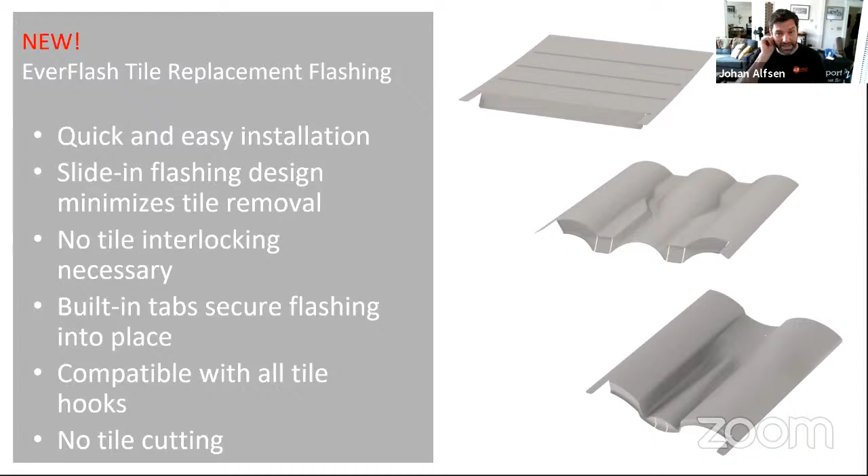I'm really happy with how these turned out. They look great, they install great, and they have all kinds of cool product features.

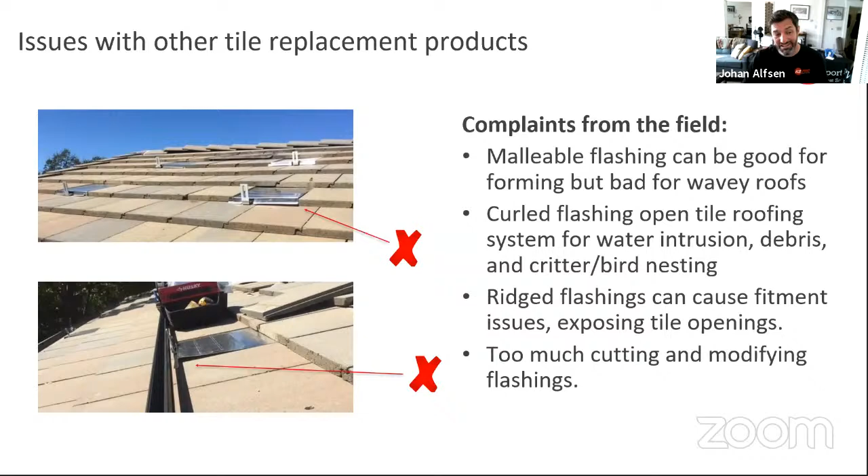One in particular - when you get these interlocking replacement flashings, a lot of times on a wavy roof you get these popping up in the corners. So we added these tabs that are proprietary to our product, and you secure them on the underlap of the tile. You lock them in so it doesn't move on you, and it's malleable so you can form them to the tile roof.

On the W and the S tile shape, we pre-installed these tabs so you can just push them back and you don't have to cut anything. The only one you have to cut is on flat tile, because on this face your hook can pop out anywhere.

But on S tile and W tile, they're always going to pop out in the valley, so we pre-installed some tabs there so you can push them back and just install it. No need to pull out the tin snips. The only one you have to do that for is on the flat tile hook, where you can just cut 2 lines and push it back wherever the face is.

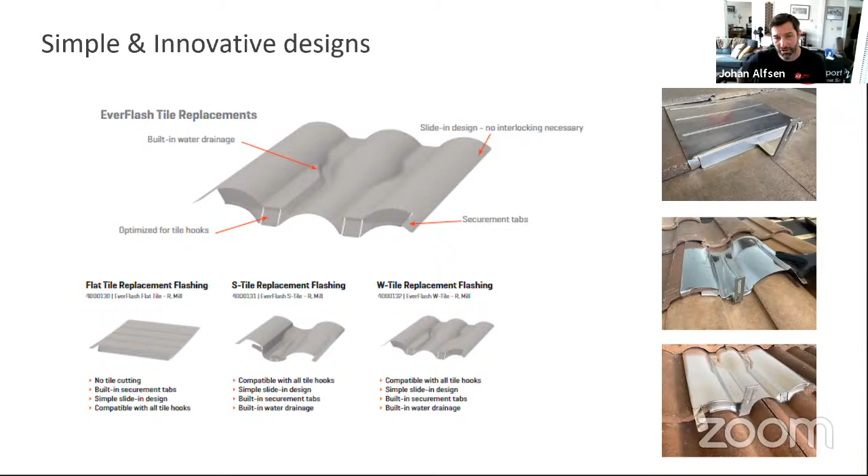This product also doesn't have the interlocks on the sides, so it's a cap over the full tile, blank tile, and it meets on both sides. They're a little wider so that you can just slip it in, lock it in, and you're done. It does also have a nail hole at the top if you wanted to nail it in and secure it. But with the hooks on the sides, over the tile hook, and the tiles pressuring on top, you probably don't need that nail on the top.

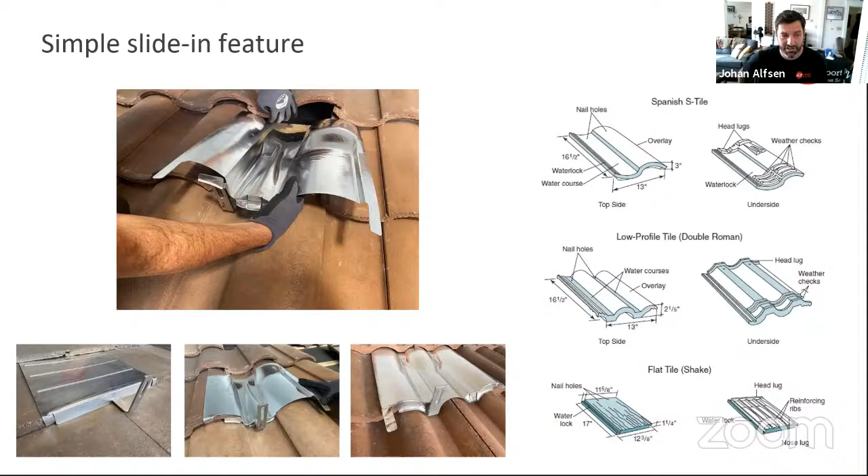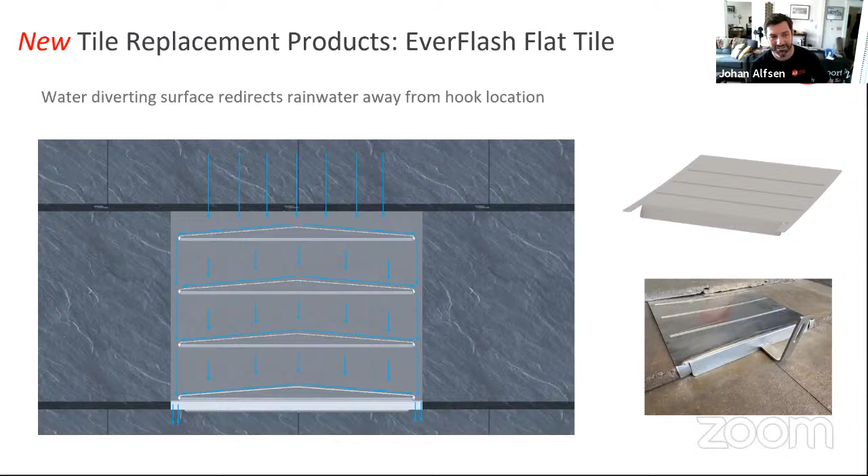Really nice product, really well engineered and designed. I worked really hard with our engineering team, and they did a fantastic job executing this. We just released this, so if you're interested in this product, definitely get a sample or just go for it, install it. You won't have any problems if you've already installed products like this. Just go ahead and buy them and try them.

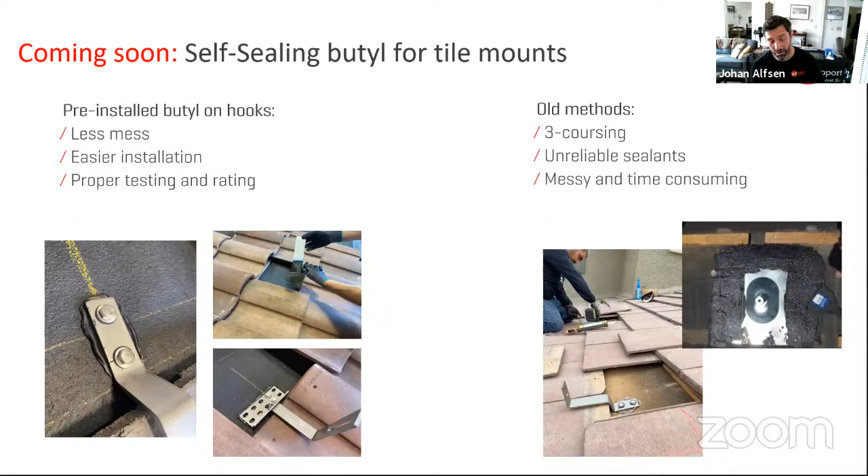We did add some water shedding features into this too. There's a lot that went into this design, but I don't want to bore you with that. One thing that's really cool is the butyl research we're doing with our splice foot. We're looking at adding that to our hooks, because we know some guys are working in cities like Bakersfield, California, for example, which is strict on having 3-coursing or underlayment flashing. So we're starting to see these butyls perform so well that they're working on tile roofs as well. That's coming, and that's going to be a lot cleaner design and install for tile roofs.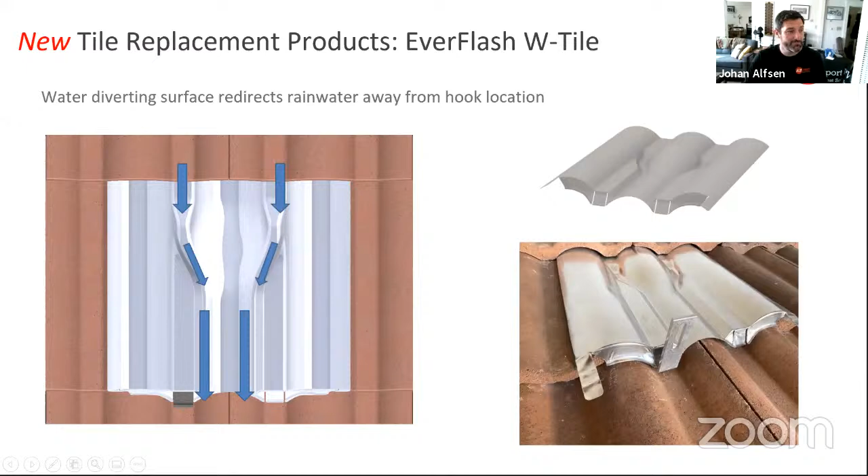Johan, we do have a question on YouTube. Okay, go for it. Can you use splice feet with shared rail installs?

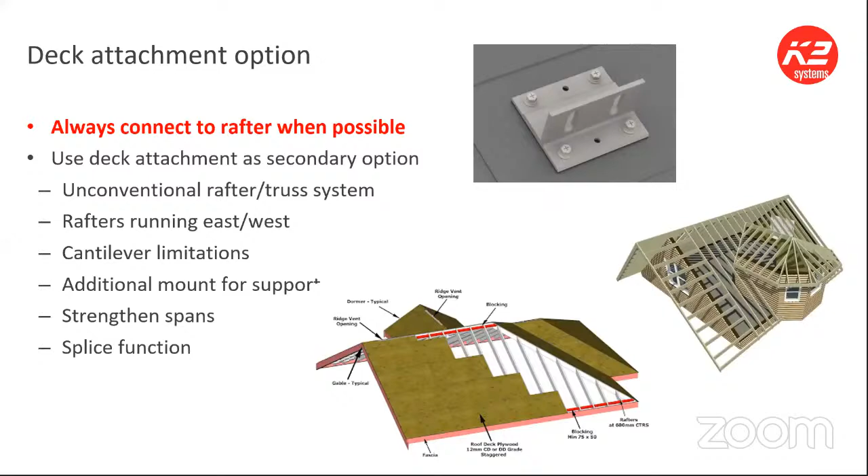That's a great question. So the splice foot that you see here, it's a fixed L foot. And I would say the short answer is no. I mean, you probably could if you were really good at math and you really wanted to nail it. But sometimes your drill moves and you're not going to have the rail meet where it is. So the reason we have, on comp shingle, this slider kit is so that you can move this L foot where you need to be so that you can meet that rail.

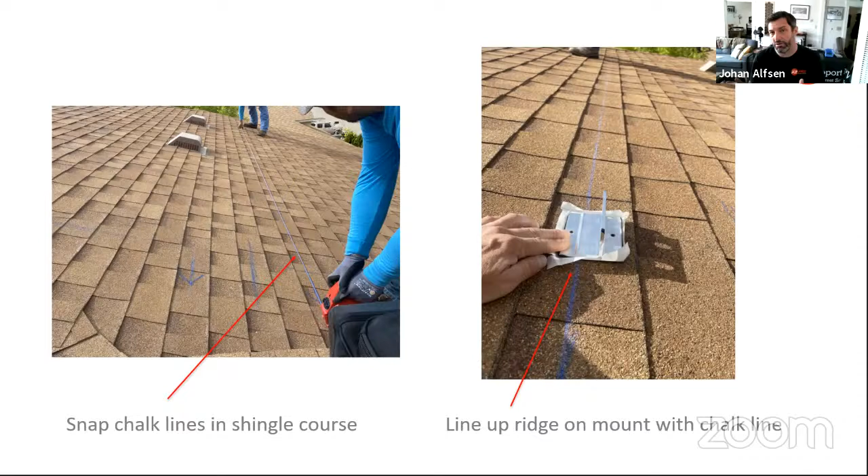That's a very good question, and I would avoid it, just because the reason why I call to do chalk lines and snap those lines is because you want your rail as straight as can be so it's not bending, right? If there's a little bit of wave in it, it's not a big deal. But on a shared rail, that would be a nightmare, because when you lay down your module to catch that module for one rail, if you're off just a little bit, it's not going to line up properly and you're going to be cursing like a sailor. So I have been there, and it's not fun if it's off. So I would say I'd avoid it.

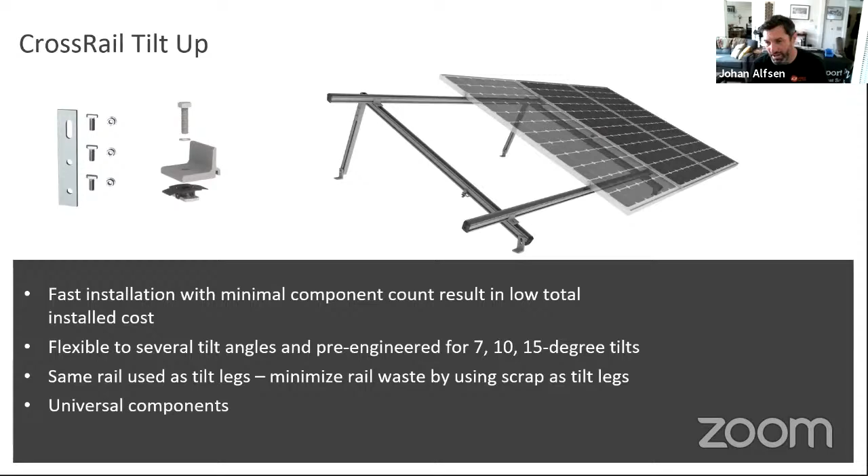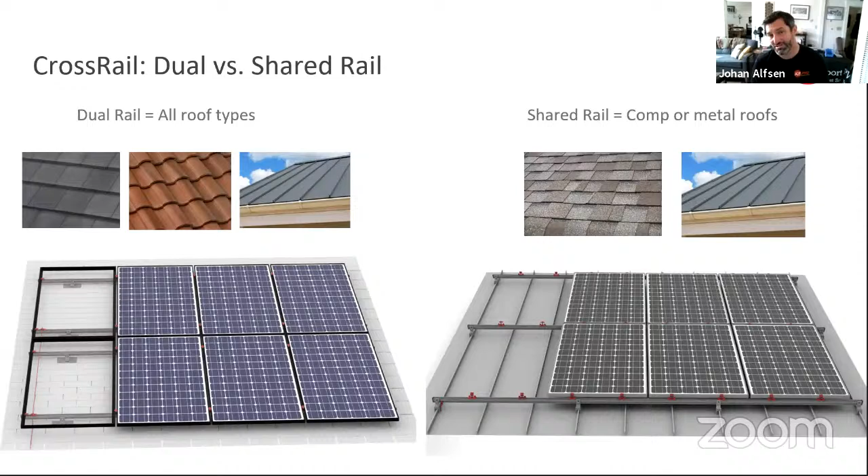What does work, interestingly enough, and I've been promoting this, is RoofTech's RT Mini, which uses the same butyl that we use. It's not our product, but I like their product, and we're partners with them.

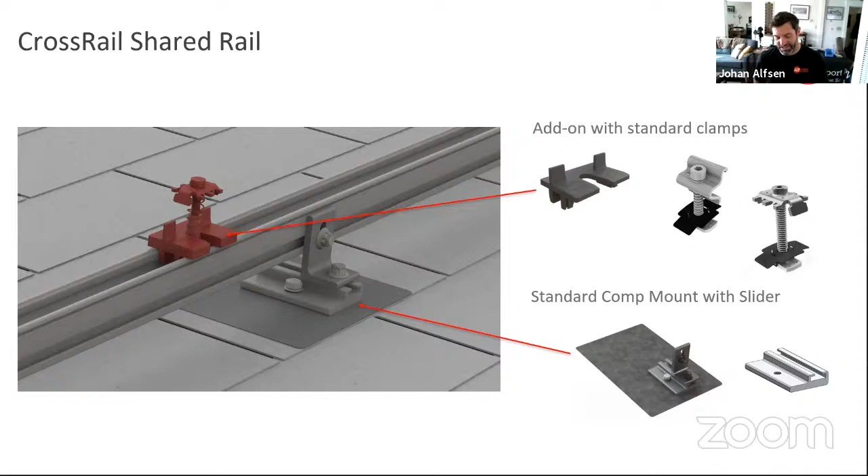The RoofTech RT Mini does allow you to slide the L-foot, as long as you're going to the rafter with their product. So to answer your question, I wouldn't do that with the splice foot, but I would do it with the RoofTech RT Mini. If you wanted that same butyl seal with the sliding feature, the RoofTech product is the solution for you. I hope that answers the question.

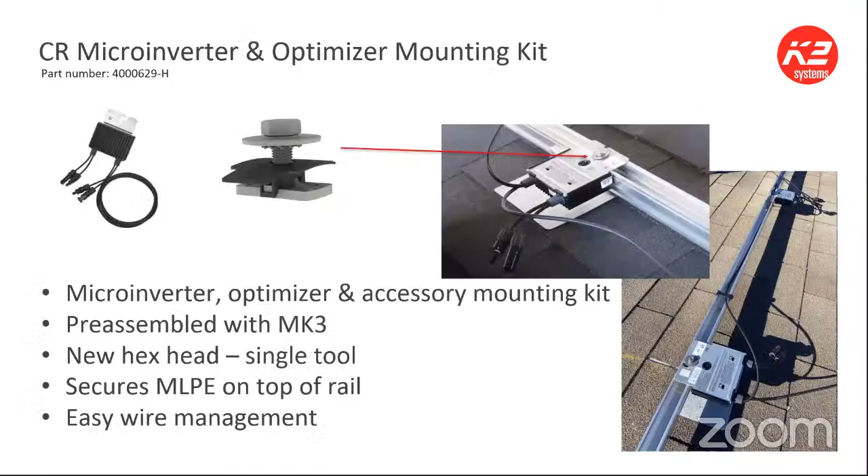Feel free to reach out. I'm just going back on slides to reiterate what I was saying. I just wanted to address one question: where can we get a sample kit?

If you're curious about this product, send an email to our marketing email or to Johan, and we can get a sample kit sent out to you. We'll just need your name, address, and quantity of sample kits you'd like. Do we still have marketing-us at k2-systems.com? That makes sense because we have Germany, Brazil, Italy, and UK. I'll put the email in the chat so you can all access it.

If you want a sample kit, it comes with a rail section like this, with the rail connector already attached, plus the mid clamp, end clamp, and the Yeti clamp. I believe it even has the add-on. Correct me if I'm wrong, Dakota—the standard flashing maybe, but it does include our splice foot. Yes, it has both options. And it also has all the small universal components, like the ground lug and the Yeti clamp. I believe it also has some of the wire management clips. So yes, all three options.